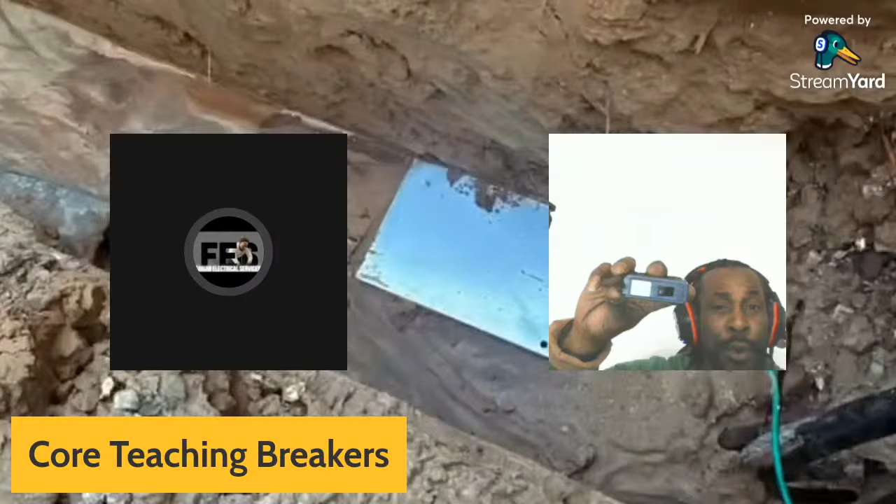So again, breakers will always protect the wire, and they will never protect the device. So for all those who are wiring - if you're wiring for your hood fan, microwave, and so on - make sure that you have the proper gauge wire. Make sure you also have the proper size breaker to avoid the interruption that it can cause.

So again, breakers protect the wire, not the devices. And what I'm going to do right now is pull up the rule for that.

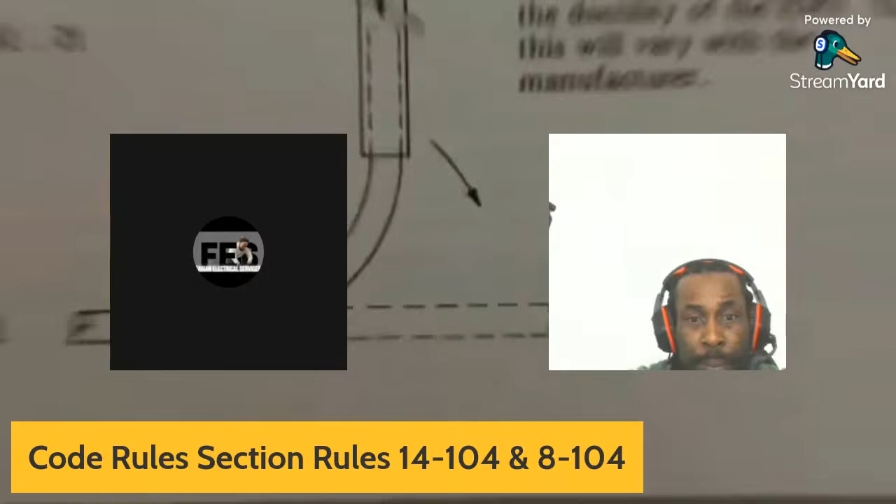Okay, so you're going to see on the bottom of the page here - just follow along with me here. It basically says 14-104, overcurrent devices, and it's also leading you to Appendix B.

And what that rule basically says is the rating or setting of overcurrent devices shall not exceed the ampacity of the conductors that they protect. So again, the rule is basically right there, and for all those who missed it, it's rule 14-104.

So the rule states the rating or setting of overcurrent devices shall not exceed the ampacity of the conductor that they protect, except where a fuse or circuit breaker having a rating or setting of the same value as the ampacity of the conductor is not available, and the maximum calculated or known load is in accordance with the rules of Section 8.

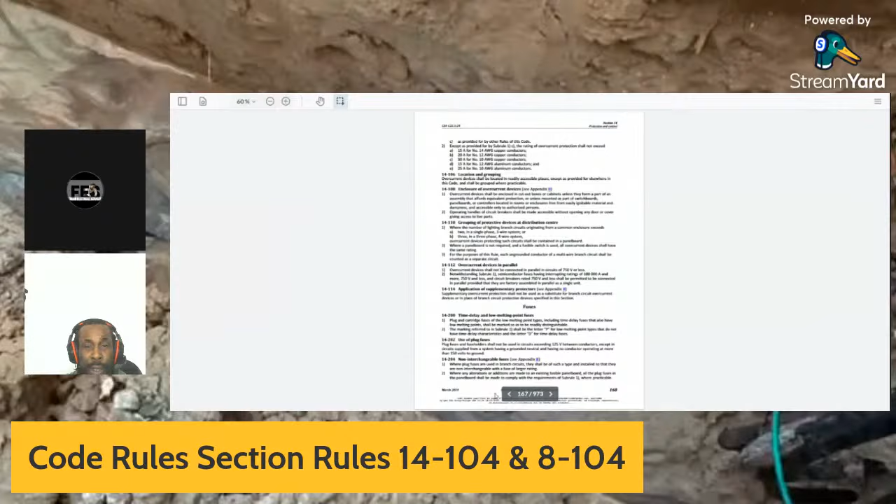So, like I said, the rule is up here on the screen, and for all those who has missed it, I'm going to read it over again before I move on to the next chapter. So 14-104, rating of overcurrent devices.

It tells you to see Appendix B. I'm not going to go to Appendix B. However, Appendix B is a very important part of this rule. And basically, when you see a Appendix B, Appendix C, whatever it may be, is basically telling you to go over to that rule and verify.

So the rating or setting of overcurrent devices shall not exceed the ampacity of the conductors that they protect, except where a fuse or circuit breaker having a rating or setting of the same value as the ampacity of the conductor is not available, and the maximum calculated or known load is in accordance with the rules of Section 8.

The rating or setting given in Tables 13 shall be permitted to be used within the maximum value of 800 amps.

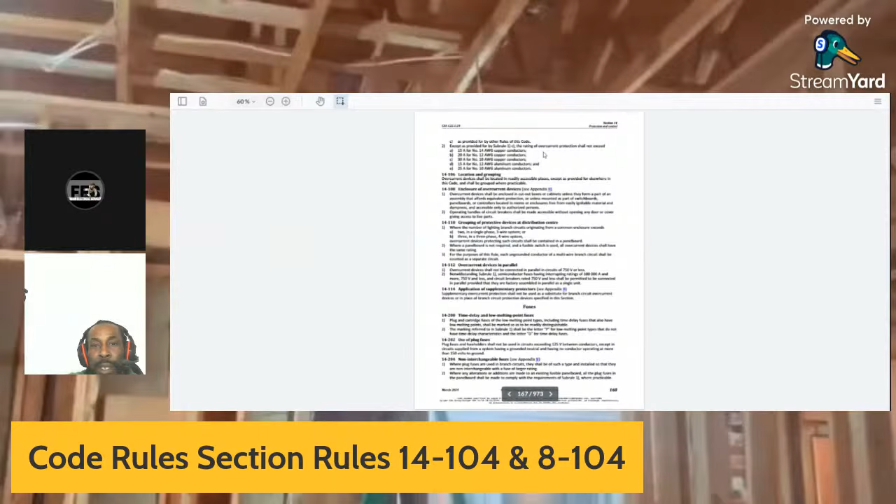The rating of overcurrent protection shall not exceed: A) 15 amps for number 14 copper conductor, 20 amps for number 12 gauge copper conductor, 30 amps for number 10 copper conductor, 15 amps for number 12 aluminum conductor.

So as you can see, the difference between A and D is one is copper, the other is aluminum. For the 15 amps for number 14, that's copper conductor. But then you also have 15 amps for number 12 aluminum conductor, and 25 amps for number 10 aluminum conductor. So that's the difference between your breaker sizing when it comes to aluminum and copper.

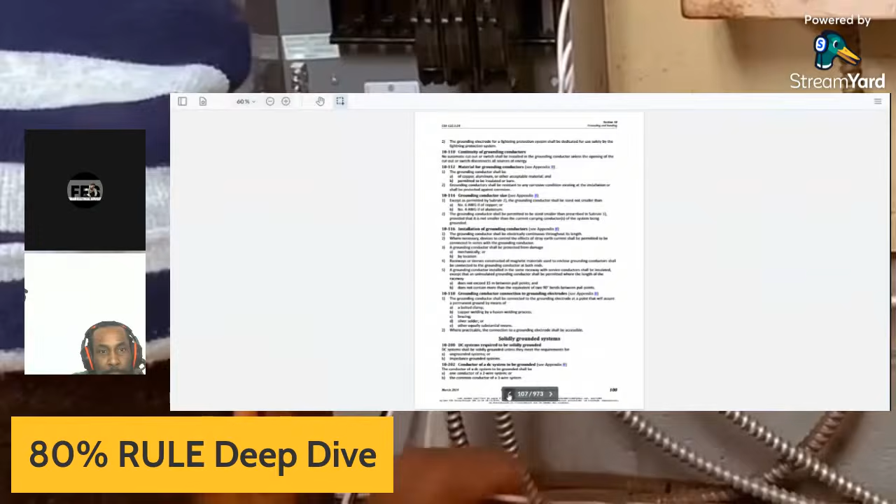So again, we're going to head over to 8104. That's the section I want to head over to. Okay, so here we are.

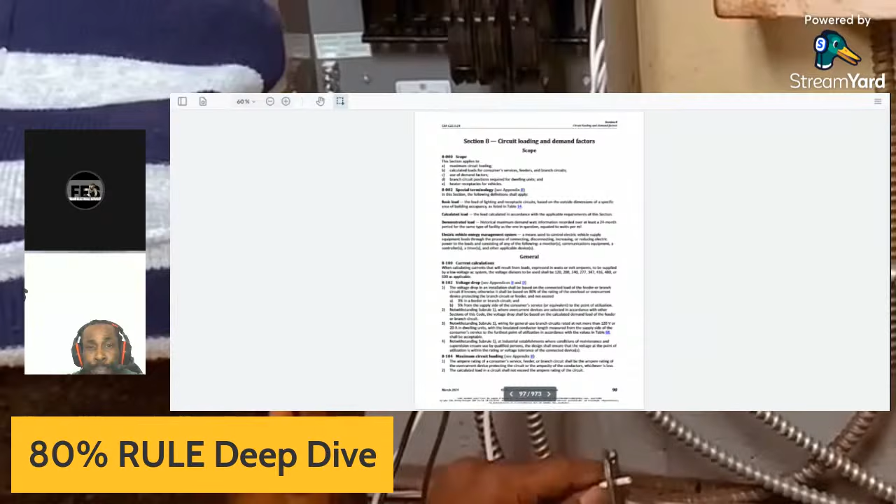This section applies to A) maximum circuit loading, B) calculated loads for consumer service, feeders, and branch circuits, C) use of demand factors, D) branch circuit positions required for dwelling units and heater receptacles for vehicles.

It also says in 8-002, special terminology, tells you to see Appendix B. And it says in this section, the following definitions shall apply. Basic loads: the load of lighting and receptacle circuits based on the outside dimension of a specific area of building occupancy as listed in Tables 14.

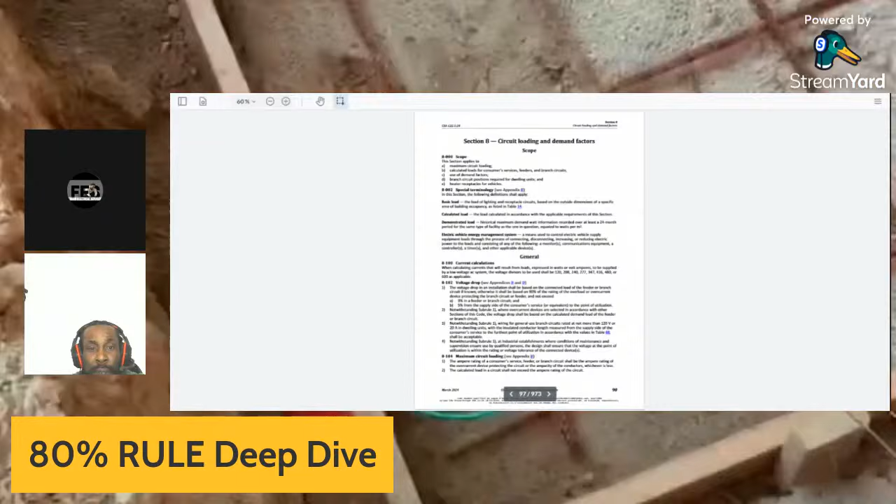Calculated load: the load calculated in accordance with the applicable requirements of this section. Demonstrated load: historical maximum demand watt information recorded over at least a 24-month period for the same type of facility as the one in question, equated to watts per meter square.

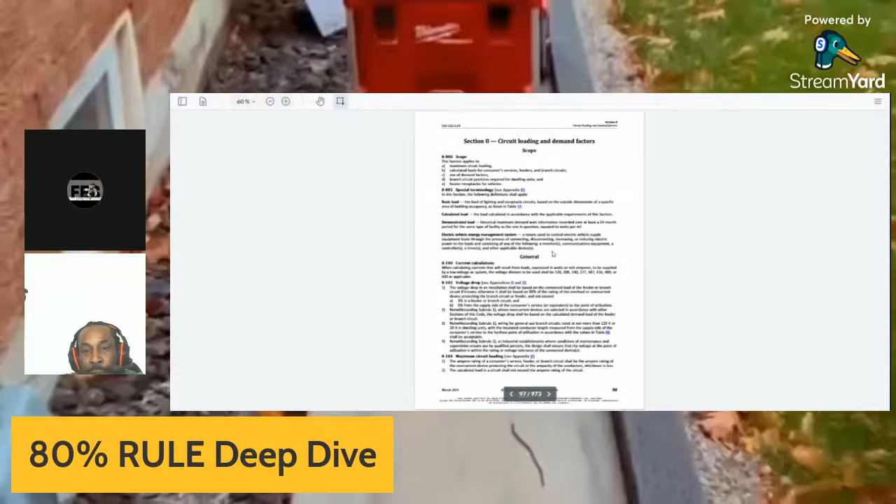And then it also tells you: electric vehicle energy management system, a means used to control electric vehicle supply equipment loads through the process of connecting, disconnecting, increasing or reducing electric power to the loads, and consisting of any of the following: a monitor, communication equipment, a controller, a timer, and other applicable devices.

So we're going to go over, sorry, I lost it there for a second.

So the rule that I actually want is 8104, which is at the bottom of the live stream. And it's basically maximum circuit loading. And it tells you to see Appendix B.

The ampere rating of a consumer service, feeder or branch circuit shall be the ampere rating of the overcurrent devices protecting the circuit or the ampacity of the conductor, whichever is less.

The calculated load in a circuit shall not exceed the ampere rating of the circuit. And then it goes on to also say this is 3.

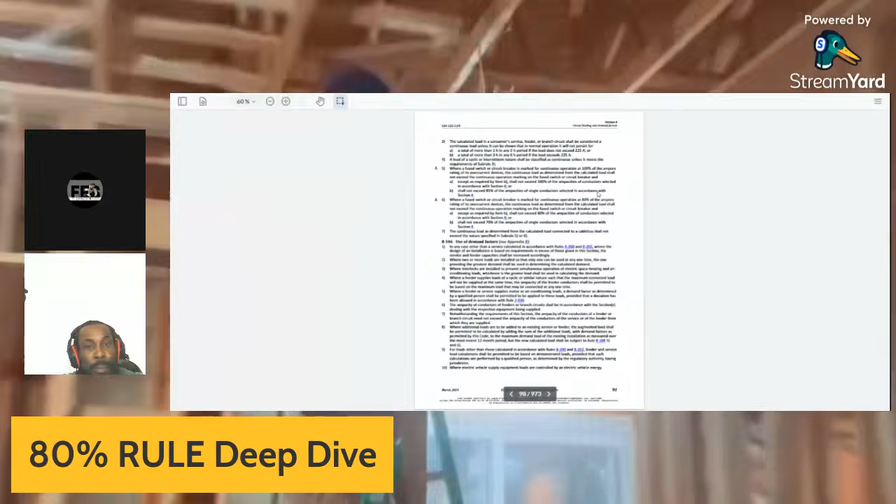Except as required by item B, shall not exceed 100% of the ampacity of conductors selected in accordance with section 4, or shall not exceed 85% of the ampacity of single conductors selected in accordance with section 4.

When a fuse switch or circuit breaker is marked for continuous operation at 80% of the ampere rating of its overcurrent devices, the continuous load as determined from the calculated load shall not exceed the continuous operation marking on the fuse switch or circuit breaker, and, except as required by item B, shall not exceed 80% of the ampacity of conductors selected in accordance with section 4, or shall not exceed 70% of the ampacity of single conductors selected in accordance with section 4.

The continuous load as determined from the calculated load connected to a cable bus shall not exceed the value specified in sub-rules 5 or 6. So again, as you see with the code, it gives you rules and tells you to relay it back to the sub-rule. This is basically how the code book works.

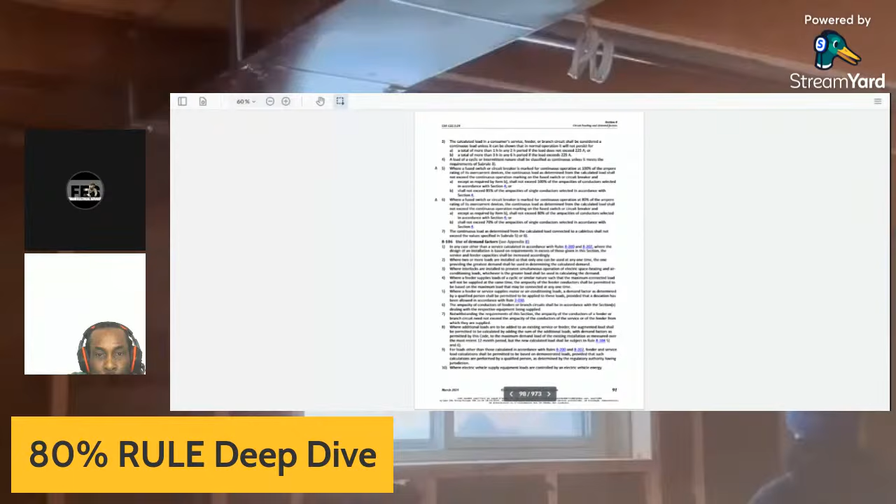So, okay, I'm going to read over 4 for those who are tuned in. Where a feeder supplies loads of a cyclic or similar nature such that the maximum connected load will not be supplied at the same time, the ampacity of the feeder conductors shall be permitted to be based on the maximum load that may be connected at any one time.

5. Where a feeder or service supplies motor or air conditioner loads, a demand factor as determined by a qualified person shall be permitted to be applied to these loads, provided that a deviation has been allowed in accordance with rules 2-030.

The ampacity of conductors of feeders or branch circuits shall be in accordance with the section dealing with the respective equipment being supplied.

Notwithstanding the requirements of the section, the ampacity of the conductors of a feeder or branch circuit need not exceed the ampacity of the conductors of the service or of the feeder from which they are supplied.

Where additional loads are to be added to an existing service or feeder, the augmented load shall be permitted to be calculated by adding the sum of the additional loads with demand factors as permitted by this code to the maximum demand load of the existing installation as measured over the most recent 12 months period.

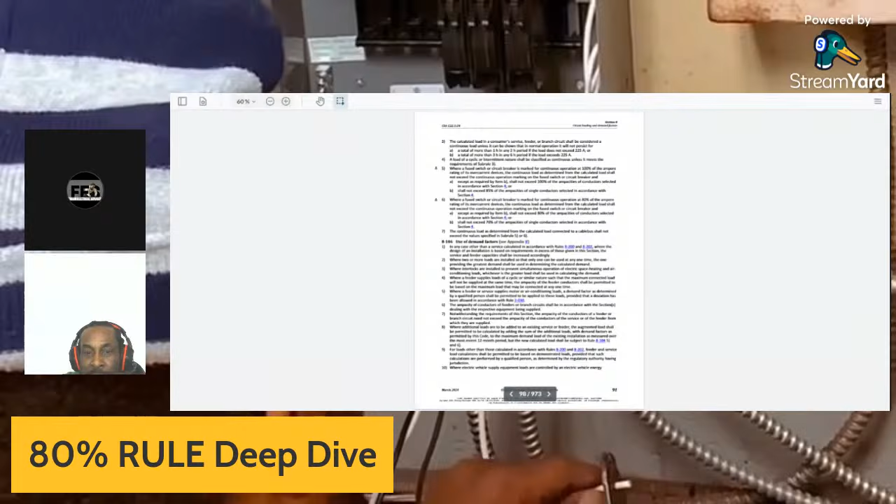So again, where additional loads are to be added to an existing service or feeder, the augmented load shall be permitted to be calculated by adding the sum of the additional load with demand factors as permitted by this code to the maximum demand load of the existing installation as measured over the most recent 12 months period. But the new calculated load shall be subject to Rule 8-104, 5, and 6.

For loads other than those calculated in accordance with Rules 8-200 and 8-202, feeder and service load calculations shall be permitted to be based on demonstrated loads, provided that such calculations are performed by a qualified person as determined by the regulatory authority having jurisdiction.

Where electric vehicle supply equipment loads are controlled by an electric vehicle energy management system, the demand load for the electric vehicle supply equipment shall be equal to the maximum load allowed by the electric vehicle energy management system.

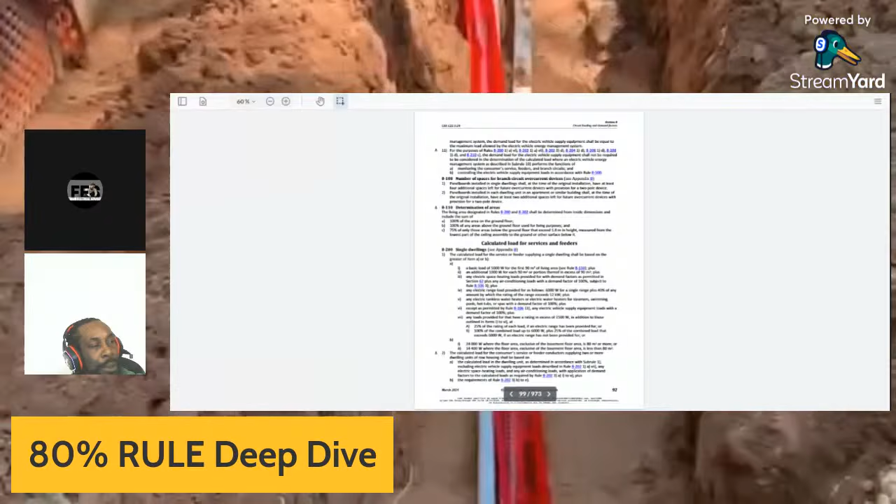So again, example: if you have an electric heater, you cannot overload it. Let's say your electric heater is drawing 16 amps.

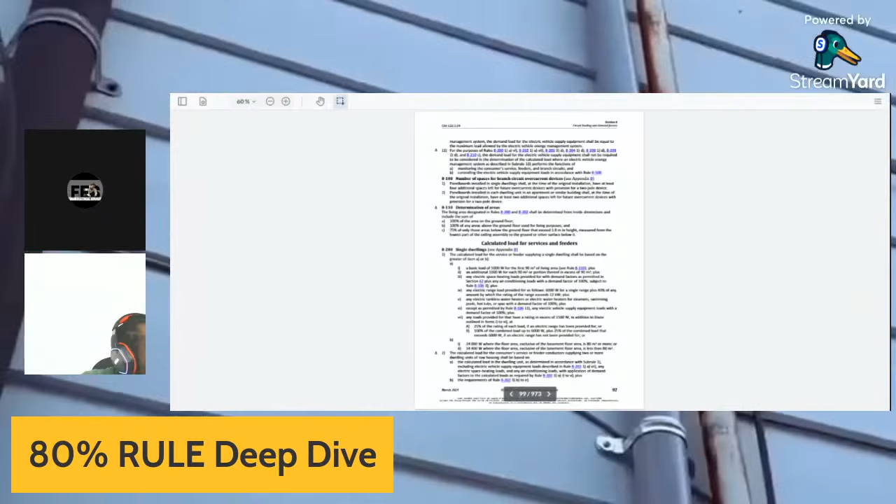You have to pay attention to the finer details to spot the mistakes, right? Yes, definitely, you have to pay attention. Again, it's important when it comes to electrical. So all details are very important. You have to pay attention.

So that's why I have this rule here. Basically, what this page is, this is the code book, it's part of the code book, and this is where I normally find the rules. Again, it's very important because there's a lot of details in these rules that you can miss, as Gloom Platoon said, you have to pay attention.

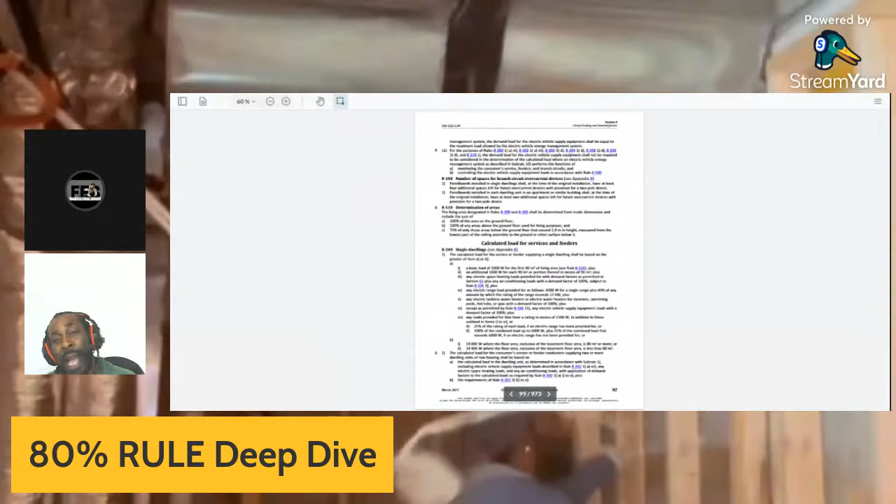There's a lot of details in here that a lot of people are not aware of. Even licensed guys also will make mistakes. The reason being is because we're so quick to read the code book that we miss the importance of what we need to know, and a lot of times we'll miss that. But if you do read it over twice, you can't miss it.

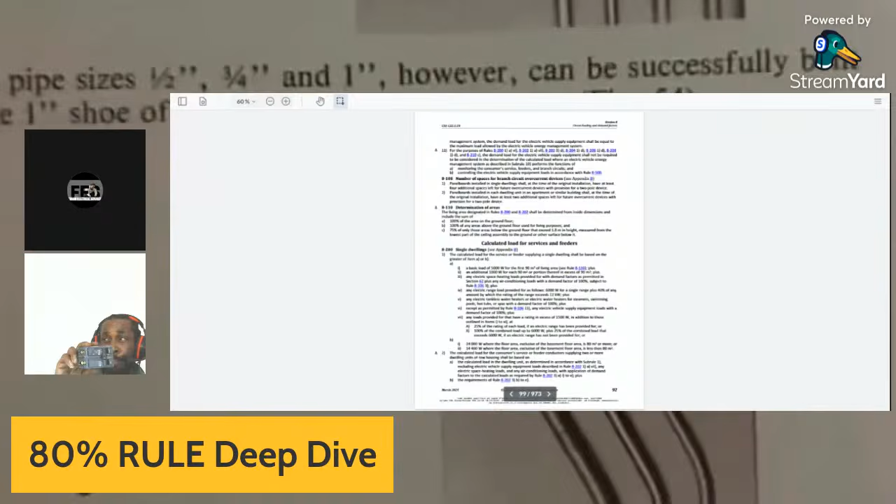So this is basically where the 80% rule comes out of, 8-104. And basically what it is: if you have a breaker like this, for instance, this is a 20 amp 2-pole. Now this breaker, you have a 12 gauge wire on this breaker. And basically, you cannot oversize the conductor, you cannot overload the current. But what I mean by that is you have to have up to 80%, and you have to have a 20% left over.

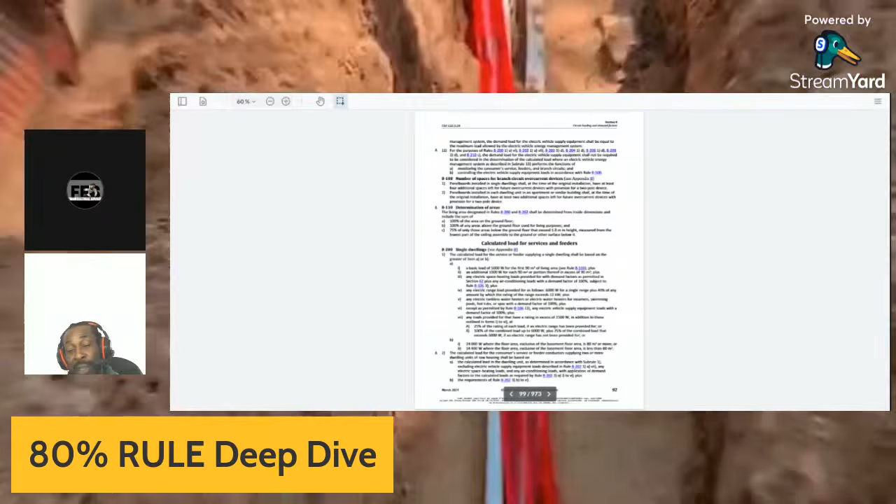So what this 20% basically does, it helps protect the wire. If there's any overheating going on, it's going to trip the breaker. So a lot of times you'll see a lot of people having issues with their circuit, with their breakers, and you probably will see that the breaker didn't trip. It's because of the 80% rule that it didn't kick in. So when you have too much load on the circuit, when you overload the circuit, that 20% cannot protect the wire like it's supposed to. And when it's protecting the wire, it will trip the breaker. That's what it's supposed to do.

Okay, let me go to the comment.

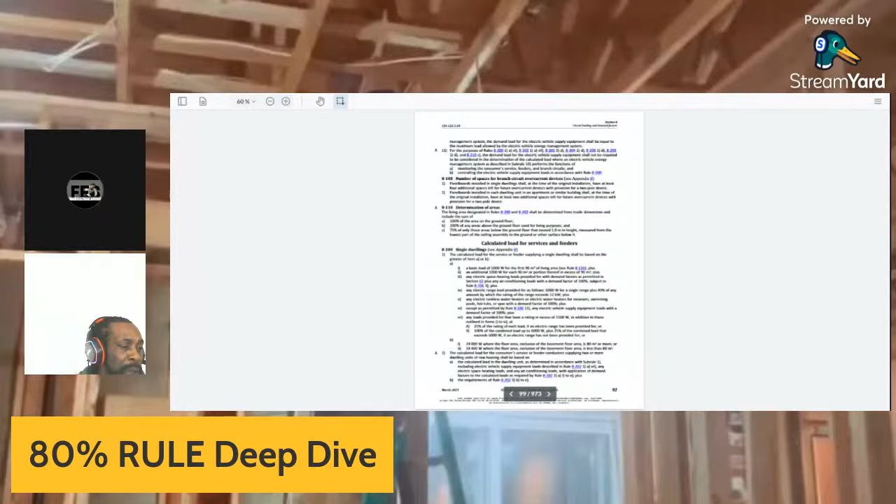Most professionals go off of experience because the work is like muscle memory, often not following the code, but that's why a lot of jobs look sloppy when you look behind the walls. Definitely, Gloom Platoon.

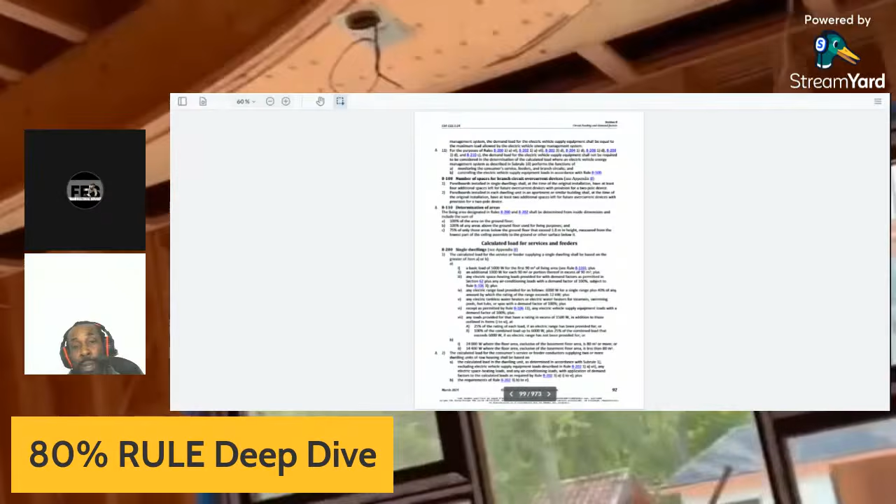It's a mistake that a lot of electricians make. I myself probably did in the past when I was younger, coming up. But because I know the safety behind all of what goes on right now, as a young apprentice coming up and a newly journeyman, you don't really know the difference. So you assume that the rule is always going to stay the same, but the rules don't always stay the same.

The rules switch as soon as there's an issue in a home. Let's say there's a fire, there was a badly mistake oversizing the breaker, or let's say, for instance, you have the arc fault breakers that are installed for protection throughout the house now. So every time something happens, they change the rule, and a lot of guys are not aware of that because they don't either check on the rules. You can pull it up and check to see if there's a rule change. So yes, a lot of times guys will just, it's called

guessing. There's a rule for it, rule of thumb. They go by the rule of thumb basically. They go by what they were taught instead of double checking. I guess it's being lazy, and that's why you do have a lot of fires in the homes, and a lot of sloppy work.

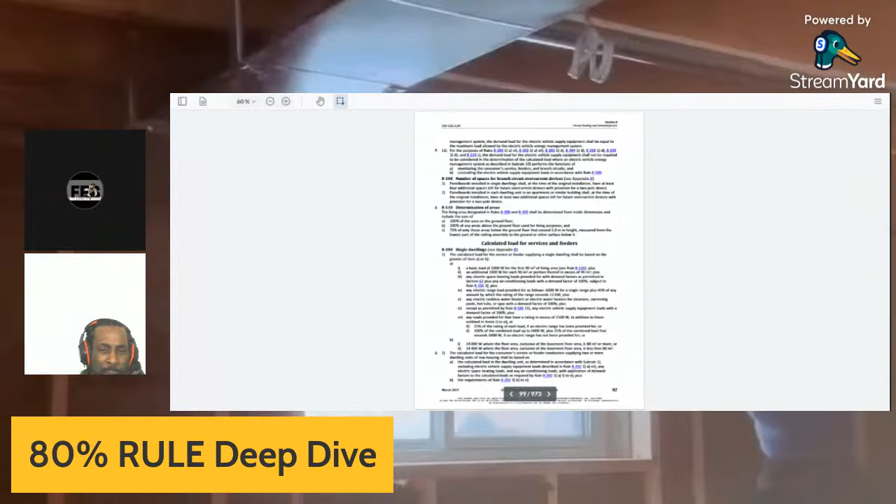You'll find a lot of wire taped up behind the drywall instead of putting it into a junction box. So that is what basically goes on inside of the homes when you don't follow the code. Again, it's not everyone that's going to know how to find these rules. If you are a DIY, you're probably not going to find these rules as fast as I will. I'm not sure, I don't really know. I'm just saying.

But this is where we get our rules from.

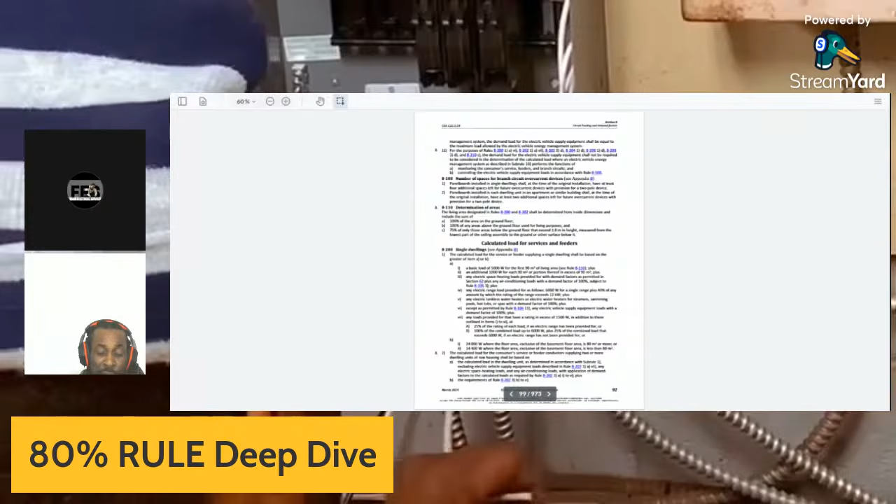So again, real installation examples. For instance, EV chargers. Many times I install EV chargers, and a lot of times what happens is either the client has one of those EV chargers that are rated for 60 amps, or rated for 40 amps, or they go down to 20 amps. They're basically adapters. You can change out the adapters, you can change out the settings

in the Tesla vehicle. So let's say you don't have a lot of amperage in your panel and you have an EV charger and you want to use 60 amps, but you don't have the required space in the panel, because again, the panel does matter. If the panel is overloaded, you cannot install a 60 amp breaker for that EV charger.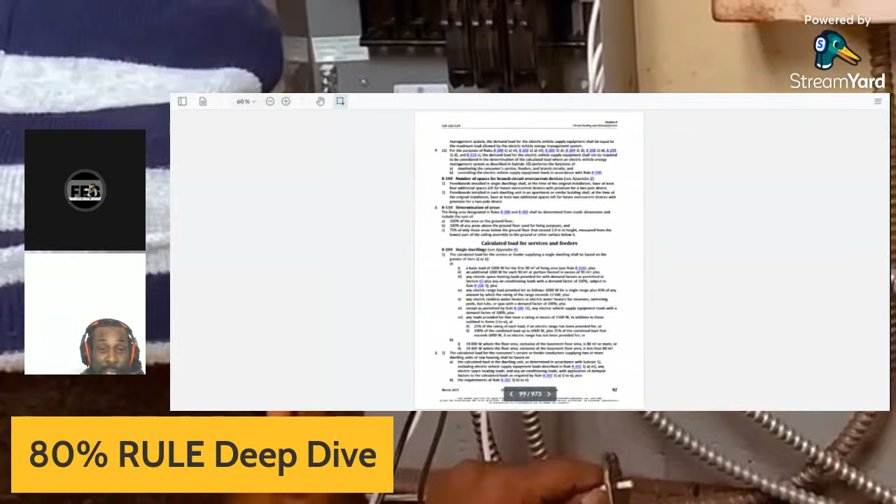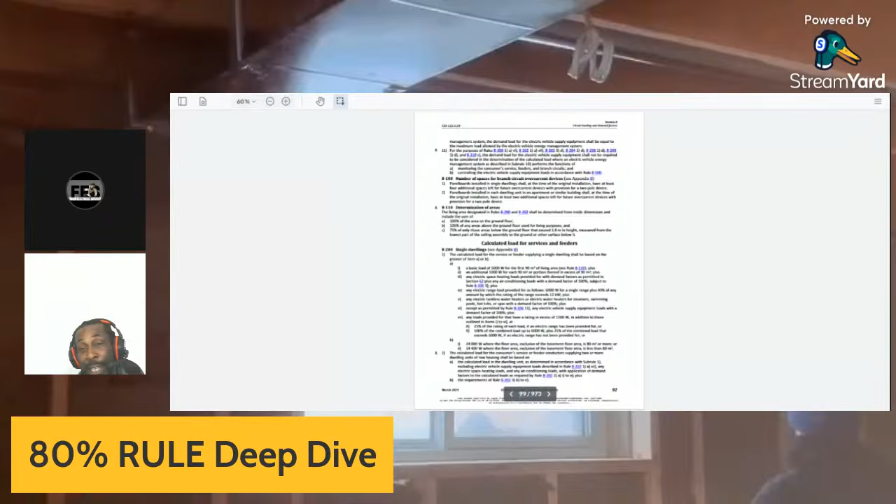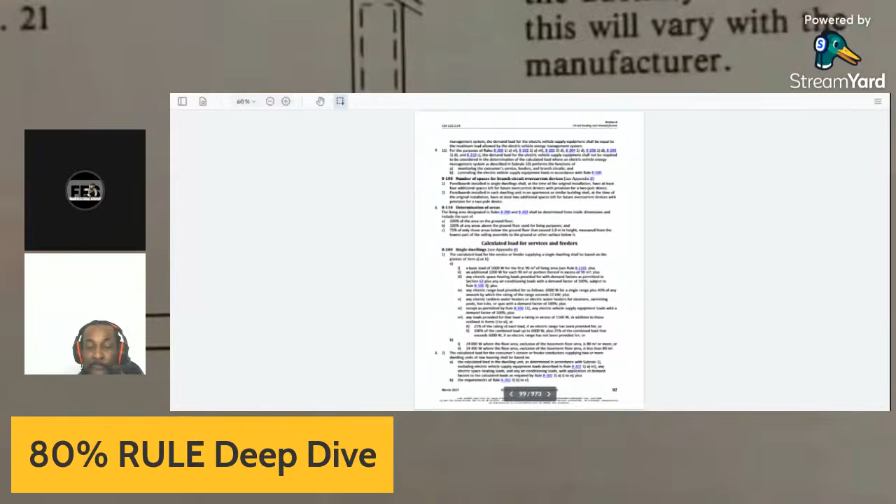So what you can do is you can drop it down to 32 amps, okay, but you're going to feed it with a 40 amp breaker. You're going to feed it with a number 8 gauge wire, or if you're generous, you can use a number 6 wire. That's normally what I do, just in case the customer wants to switch back from the 32 amps to the 60 amps, but the 60 amps actually becomes 48 amps instead of 60 amps.

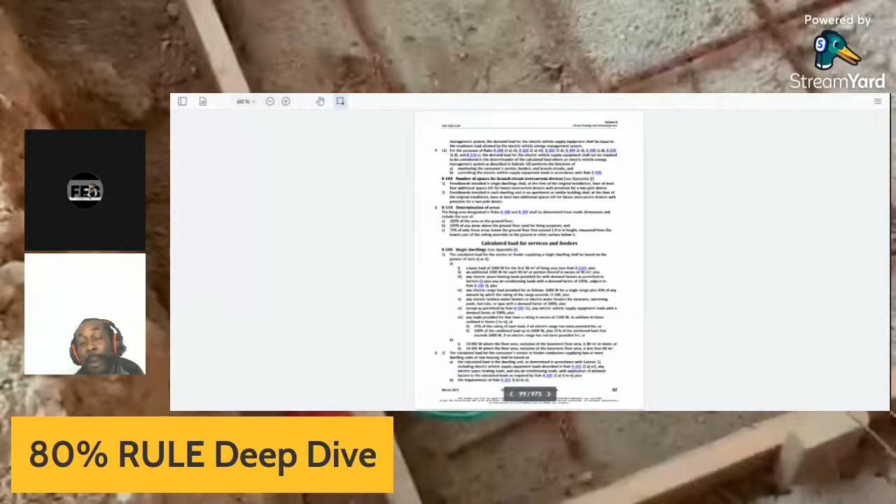So you still have that protection. You still need that protection, even though it's an EV charger, to protect the wire. So if you are going to be loading at 48 amps, you're going to have to fuse it at 60 amps, which there is no—

So what's going to happen is you're going to have the 60 amp breaker, but the actual EV charger is going to be drawing about 48 amps. That's the protection that's going to be kicking in. The wire and the breaker again leads back—you have to protect the wire on the circuit with your breaker. So again, you're not protecting the appliance, you're protecting the wire.

Again, if you want to go to 32 amps for your EV charger, you use a 40 amp breaker with a number 8 wire, and the 32 amps gives you that 20% that you need in order for your circuit to work accordingly.

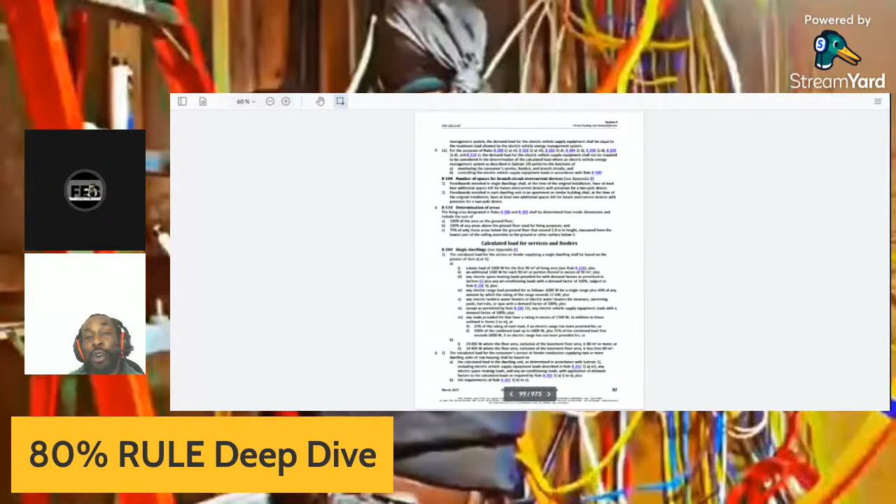Again, these are all inspections, so you have to make sure it's properly done. With lighting loads, the difference is it goes for 1500 watts. So for lighting, let's say you have a pot light drawing 0.2 or 0.4 amps, whatever it may be, add those up. As long as you're not over 1500 watts, you have to be about 1200 watts for your circuit to work accordingly. That's the lighting load.

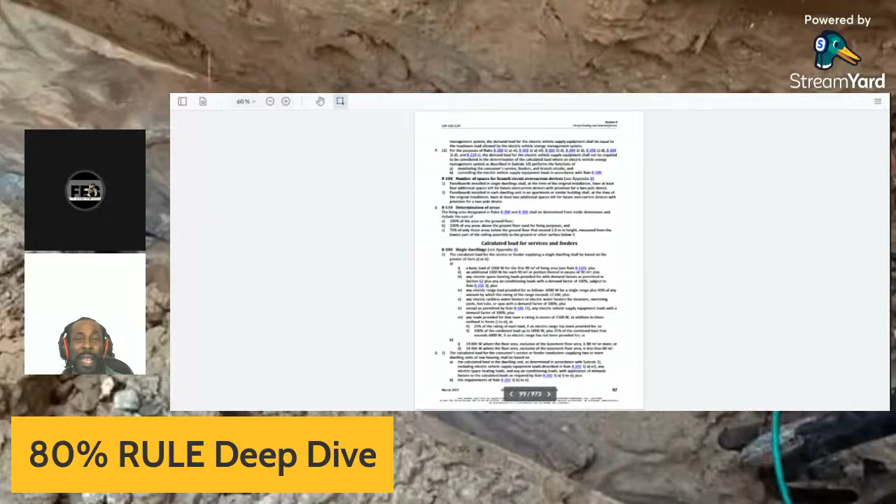Number 14 is normally used for a lighting circuit, but you can step it up to a 12-2 wire. It all depends on the distance also - that's probably going to be another live stream. When I say distance, there's a voltage drop, so it all depends on your distance and how big the house is. You'll probably use a 14 or a 12.

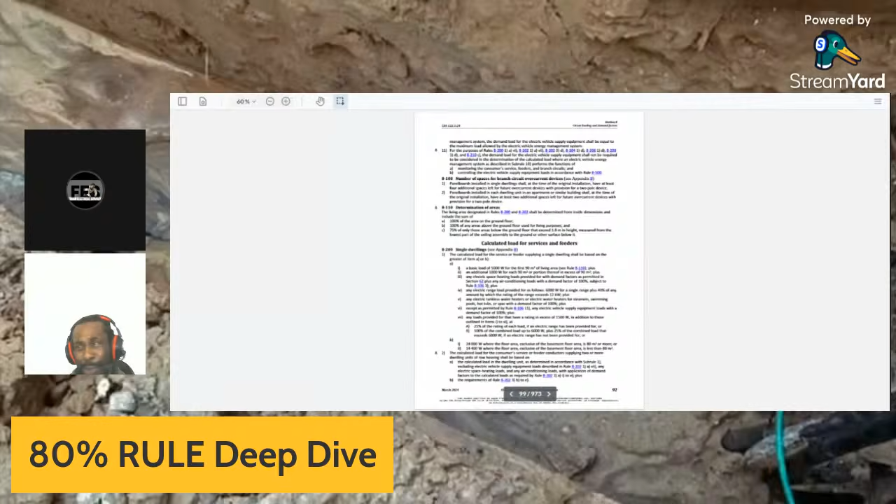That's why a lot of times you'll see homes in the bathrooms with the light and the fans start to flicker because there's too much on the load. I have to change this setting here, guys, one second.

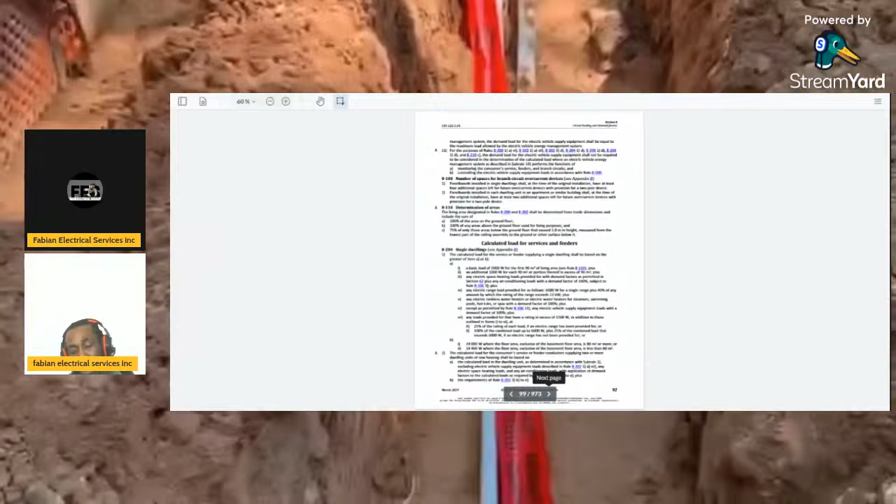You've basically mixed motors with lighting. There's nothing wrong with mixing, nothing wrong with putting your bathroom fan and your lighting on the same circuit. The problem is if you have too much load. Let's say you have your plug, your bathroom GFI, and you plug in your hair dryer, and it's connected to that - then you have too much load. It's going to start to flicker and so on, and it's probably going to overheat. So that's basically the lighting circuit.

Again, it's very important to make sure that's correct. Even on jobs, I've seen 14 gauge wire on a 20 amp breaker - it's not correct. If you're going to have an inspection, it doesn't matter, you should always try to do the job correctly regardless. Some jobs don't require inspection, most jobs require inspection, it depends what you're doing. So even if you don't require an inspection, you should always try not to put a 20 amp breaker on a 14 gauge wire.

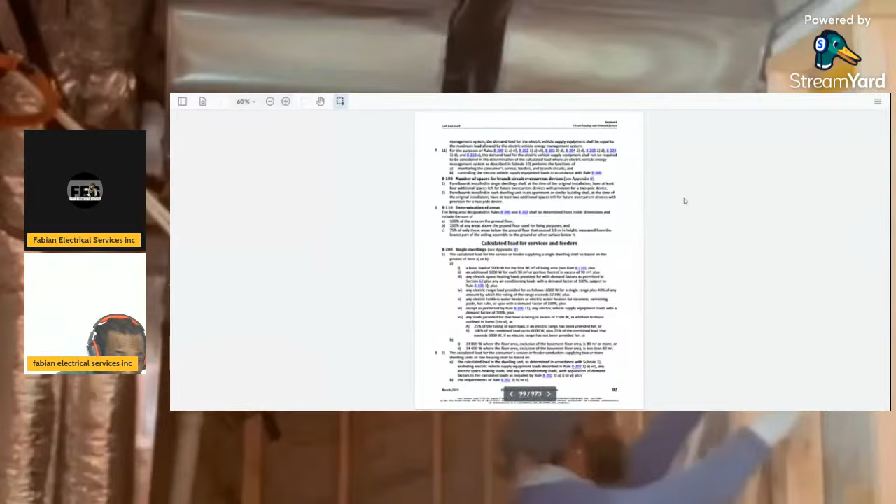The voltage is different in a commercial building and a residential building because of the size, or because of the expected amount of load. In residential, there's not a lot of big loads going on, so the voltage is definitely going to be different. In residential, you normally have a 100 amp panel, 200 amp panel, or you go up to a 400 amp panel.

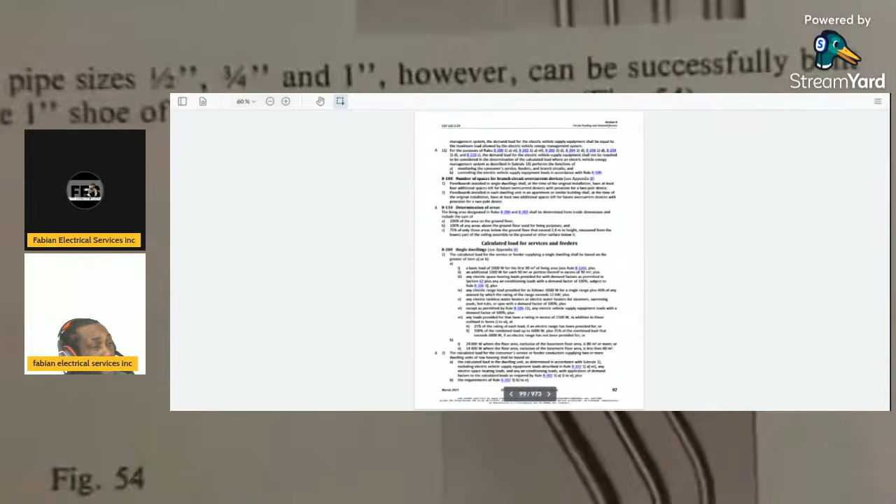You also have in between, 150 amps, but again they don't have a whole lot of load. Even your EV charger doesn't draw a whole lot. So when it comes to homes, it depends on the size and what's going on. If you check out my videos, you'll see the current home I'm working on - it's a pretty large home, and it's a 400 amp service because there's a lot of stuff going on there.

When it comes to commercial, you have to calculate it according to the specs. In commercial, they normally give you a set of specs - everything's laid out, everything's planned. You have your base building drawing, your tenant drawing, stores if there's going to be in there, so they calculate that load accordingly. In commercial, it's a three-phase system, so what happens is you're allowed to share neutrals. When you start to share neutrals, it becomes a lot different from residential.

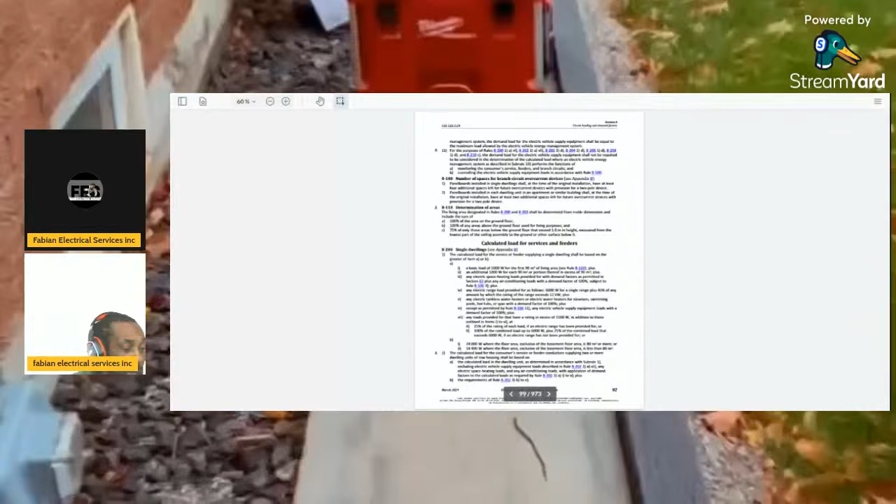You're basically sharing neutrals in order to have your circuit flow efficiently. So that's the difference between residential and commercial. Residential is single phase, I hope I'm explaining it properly to you. But yes, the voltage is definitely a big difference in commercial.

Like I said, commercial is... I'll actually go to the commercial rule now that you brought it up, and you will see.

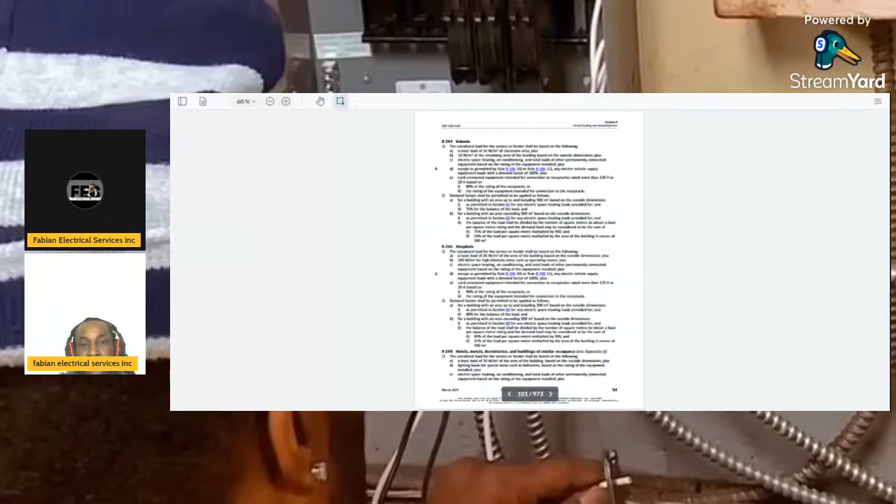Schools, for instance, this is a commercial building. It says the calculated load for the service or feeder shall be based on the following: a basic load of 50 watts per meter square of classroom areas, plus 10 watts per meter square of the remaining area of the building based on the outside dimension, plus electric space heating, air conditioner, and total loads of other permanent connected equipment based on the rating of the equipment installed, plus, except as permitted by Rule 8-106(10) or Rule 8-106(11), any electric vehicle supply equipment loads with a demand factor of 100%, plus cord connected equipment intended for connection to a receptacle rated more than 125 volts or 20 amps, based on 80% of the rating of the receptacle or the rating of the equipment intended for connection to the receptacle.

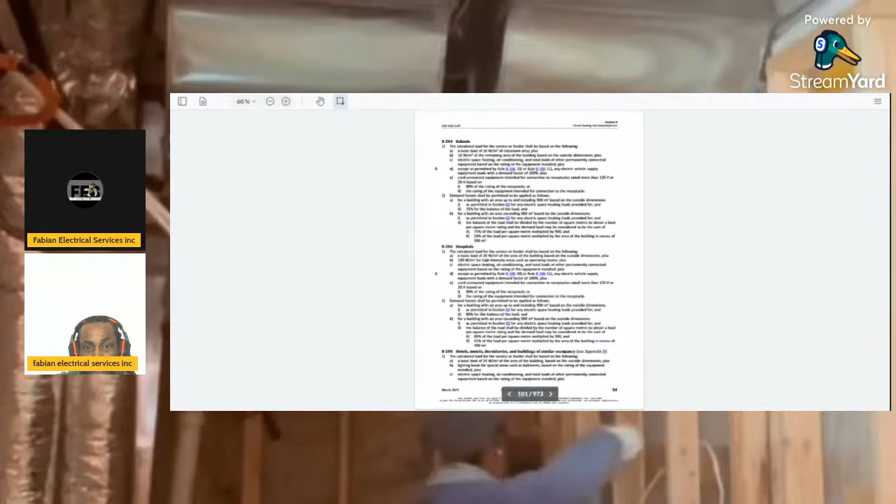Demand factors shall be permitted to be applied as follows: for buildings with an area up to and including 900 meters squared based on the outside dimensions, as permitted in section 62, for any electric space heating loads provided for, and 75% for the balance of the load.

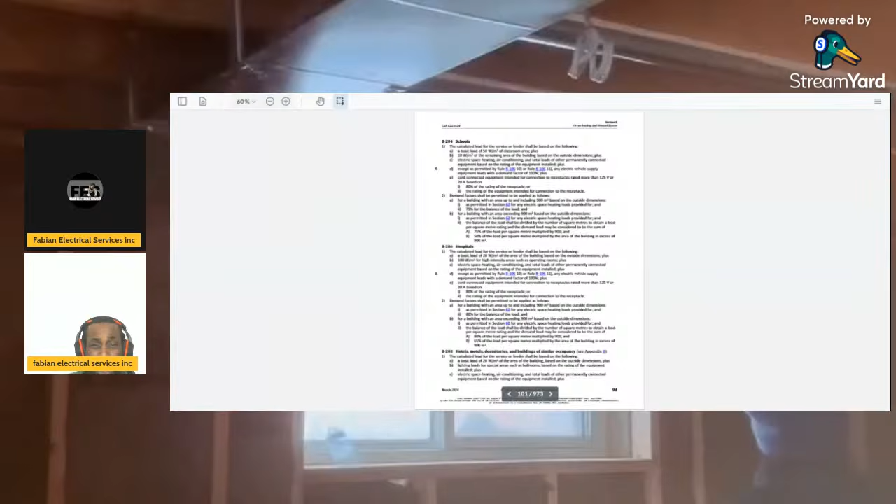So this is basically where we get our calculation loads from. There's a big difference between residential and commercial. Again, commercial, you do have a lot of heavy equipment going on, so the load factor is going to be a lot bigger. And again, commercial is 600 volts, while residential is 300 volts. So there's a big difference.

And that's why you'll see a lot of times in commercial tenant restaurants and so on, or strip plazas, they'll bring their power in to the disconnect and leave it. It's up to us as the electrical contractor to go in and calculate the load that we're going to be allowed inside of that commercial building. So yes, it is a big difference.

So again, on jobs, I've seen number 14 wire with a 20 amp breaker, and that's a problem when it comes to overheating. You can't have anything overheating.

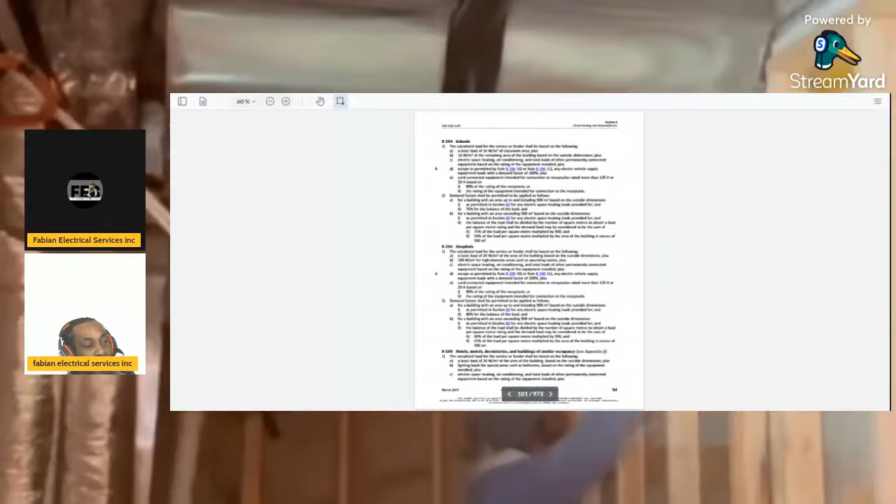So I'm going to go on to common.

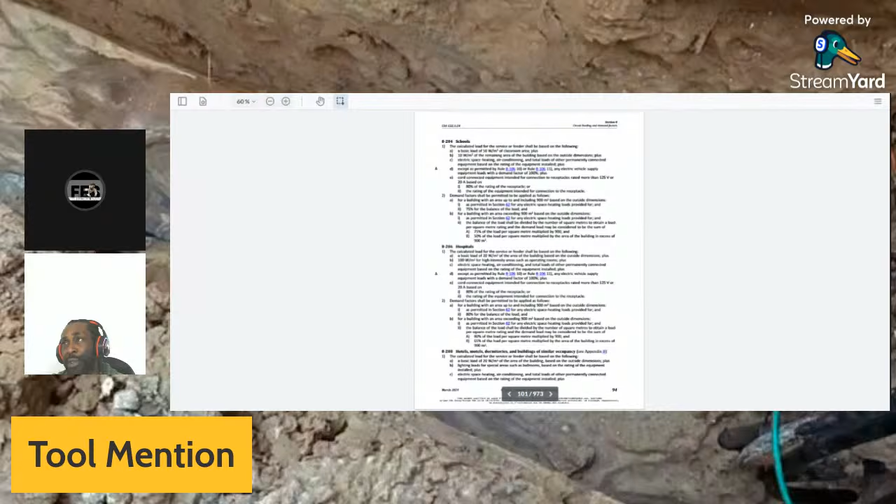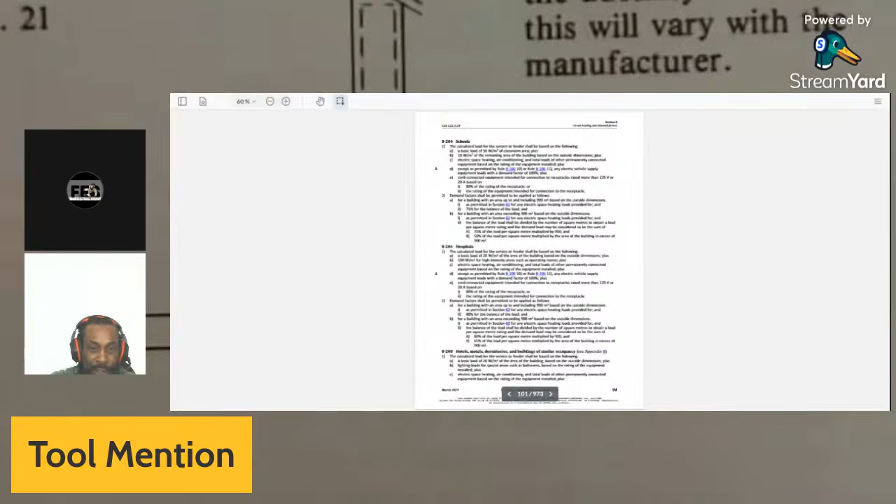Yes, no problem, Bloom Platoon. You're welcome. So again, I'm going to... that's the breaker finder that I use to basically find my circuits.

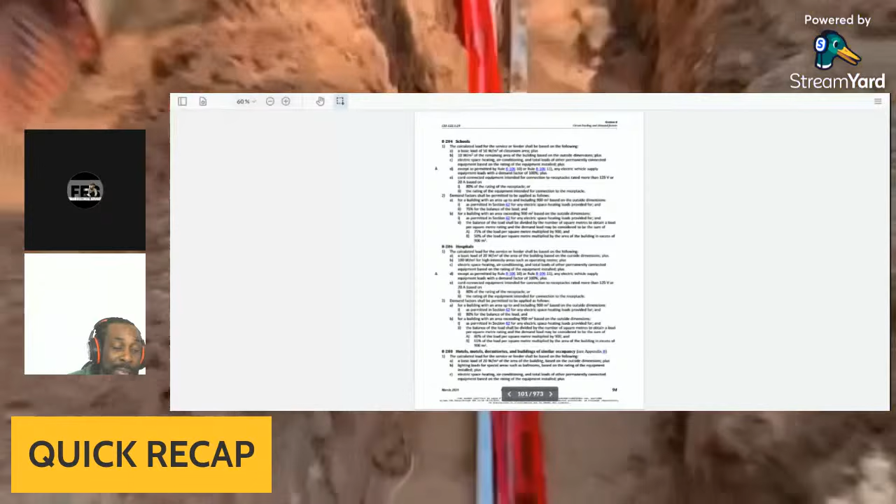Breakers protect conductors. They don't protect the equipment, and a lot of times people are under the conception that the breakers actually protect the equipment, but the breaker is not there to protect the equipment, it's there to protect the wire.

That's why if you have a 14 gauge wire, you have to have a 15 amp breaker on that circuit. If you have a 12 gauge wire, you have to have a 20 amp breaker on the wire. If you have a 10 gauge wire, you have to have a 30 amp double pole breaker on it. And if you have an 8 gauge wire, you have to have a 40 amp double pole breaker on that in order to protect your wire accordingly.

Again, you can oversize your wire, but your wire has to be able to fit inside of the breaker itself. So let's say, for instance, this is a 20 amp breaker, and if you have a number 10 gauge wire and you want to install it on this breaker, you have to make sure that it's going to fit in the slot here.

Okay, so very, very important. When you are sizing your breakers, if you are going to oversize your wire, just make sure that your wire will fit in the breaker. So again, breakers protect the wire. They don't protect the device.

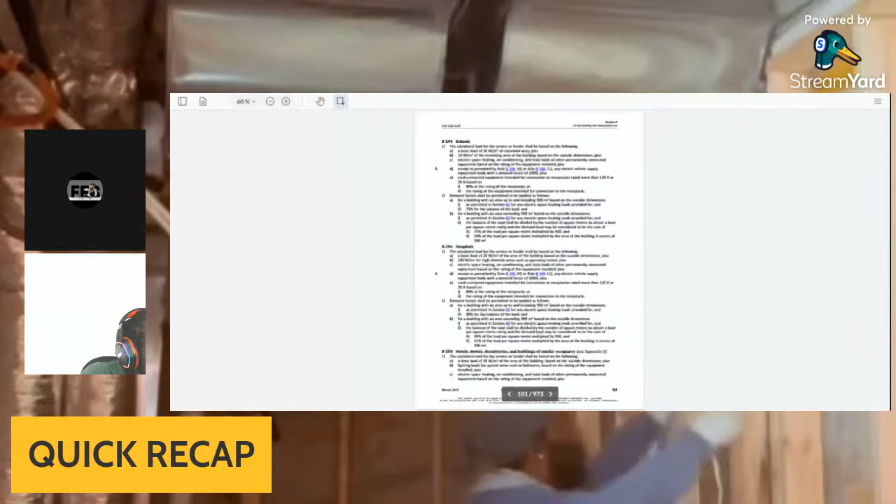So again, Rule 14-104 is basically where you're going to find your overcurrent device. So that's basically where you're going to find your breaker rules and so on. And it simply goes on to say breakers must not exceed conductor ampacity. It prevents conductor overheating.

And again, 14 gauge wire on a 20 amp breaker, that is a big mistake. And you're also asking for a field inspection issue. The inspector will fail the job. 14 gauge wire on a 20 amp breaker, you're not going to pass that job. You will get a defect, you will get a defect. It's a simple swap out for breakers.

And Rule 8-104, this is the rule that I'm currently in. And again, maximum circuit loading. Continuous load must be calculated at 125%.

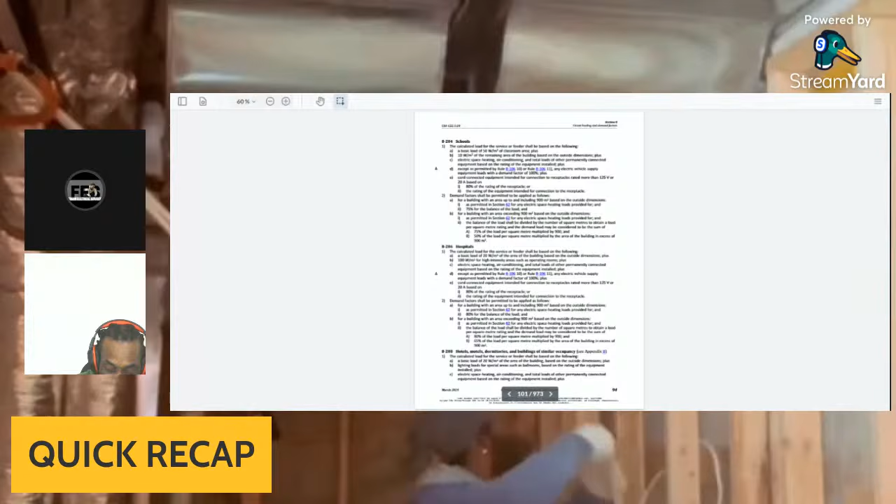A lot of the new toilets have the receptacles that are required. They have the lights inside of them and so on. When you walk into the washroom, the cover will lift up. So those require a nameplate. They also require what's called a CSA sticker. A CSA sticker allows you to basically install that device.

Without a CSA sticker, you're basically asking for issue. So this is the breaker I have here, and if you look at the front of the breaker, you're going to see there's a CSA stamp here. That's basically what you're looking for when you're installing your devices. You have to make sure you have that CSA standard on it.

Bloom Platoon says, even on small jobs, wiring or rewiring, you have to check for any breaks in the wires before you say complete. Even the wires sometimes are not perfect when you unroll.

Yes, Bloom Platoon. So most new wires will come perfect, but the problem is when you're pulling the wire. So it all depends on how you pull the cable.

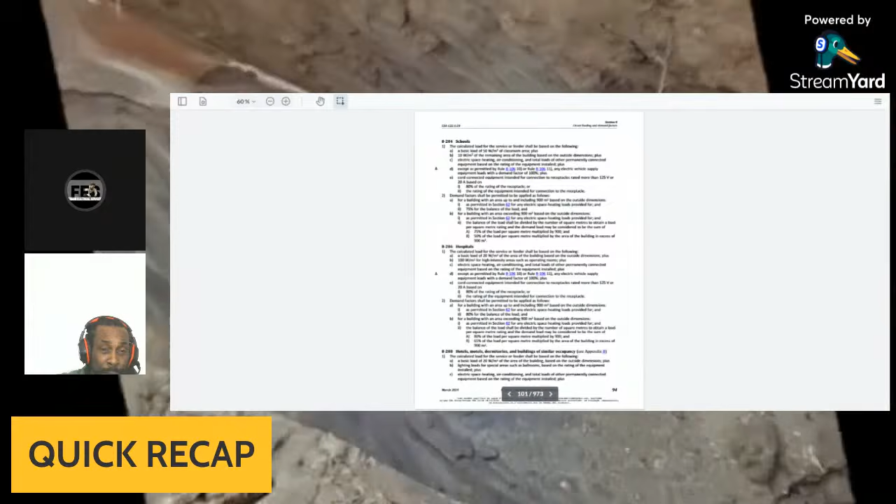There's something called a wire spool that you use, and basically what you do is you set up your wire on the wire spool, and once you start to pull your cable, you always have to pay attention to what you're doing. Yes, I have run into that issue where once you start to pull the cable, you can damage the wire.

And when you do walk away from that job, and if the drywall is up and so on, you're going to have an issue. That's why a lot of times when I do my roughing, I make sure that before I have my inspection, let's say my first roughing inspection, I do a walkthrough before I actually call for the inspection to make sure there's no broken wires and so on.

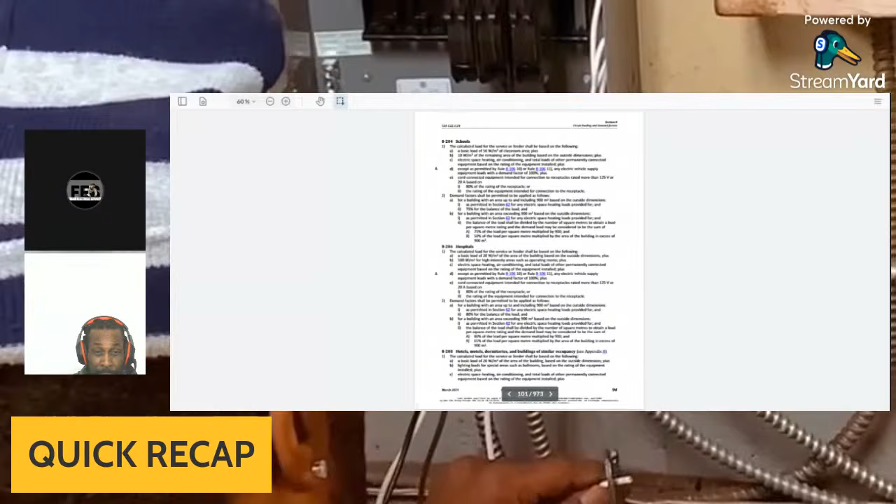And also, again, the way you staple inside of homes versus commercial is different. A lot of commercial jobs use EMT, TECK cable, and so on. Residential is mostly the NMD90 and so on.

Those wires you're going to see on the screen, the set of yellow cable here, that is what we normally use in residential. What happens is when you pull those cables, if you catch it on your nail, it's going to get damaged.

It's a lot different, but again, if you have a wire tracer, you can trace your wires out also. There's a lot of stuff you can do to make sure your actual wire is safe at the end of the run. You can test your wire through continuity, whether using a meter or your toner. There's also a toner you can use to ring your wires out. So there's many different things you can use to protect yourself when it comes to that.

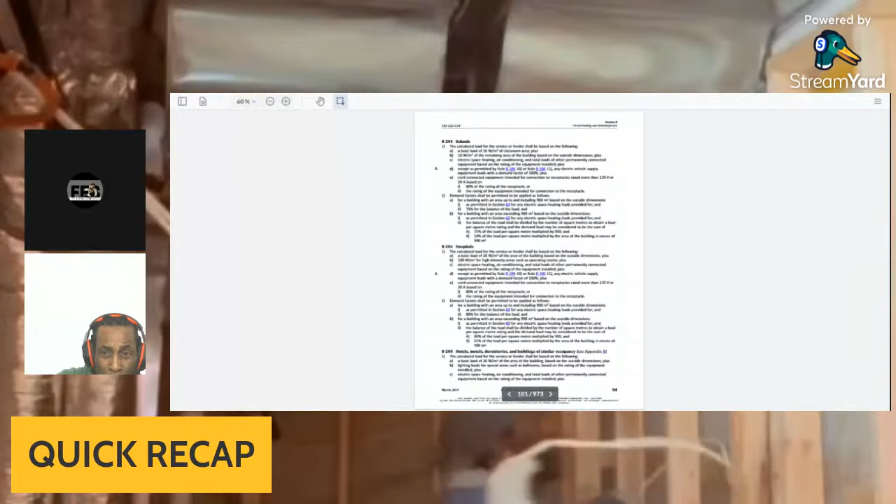When it comes to sizing my breakers, whether commercial or residential, you have to make sure you calculate the load, you have to calculate what you're putting on that circuit. Most times, if I'm doing a job and the client has, let's say, a built-in oven, those hardwire ovens, I want to make sure I have the appropriate amperage, so I'll check the nameplate. Even your air conditioner outside has a nameplate on it. Basically, that's how you find your amperage.

Again, there's also, you either go up or go down, it depends on the circumstance of what you're doing. So it's very important to basically size your cable accordingly, and make sure your breaker is sized accordingly. So that's basically the quick recap here.

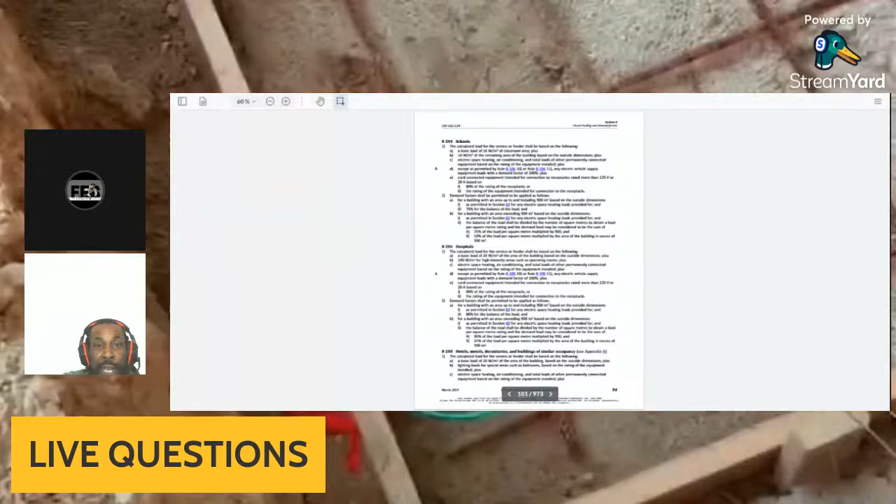It is a live Q&A, and you get to ask your questions. I get to answer them for you as best as I can when it comes to the knowledge and being in the trade for so long.

So again, this is the rule that I've been using for tonight's live stream. For all those who missed the beginning of the live stream, you're going to see this rule along with 14-104 on the live stream. This is where I go to find the code rules.

A lot of mistakes happen on the job. It's not because we are unaware - a lot of times journeymen are aware, electricians are aware, but sometimes it could be just tiredness, laziness. That's the reason why sometimes you'll see breakers mismatching in the panel. It's not because we don't know, or the person before didn't know. It could be simple laziness happening, guessing instead of using the code book, which is very dangerous. Always best to double check the rules.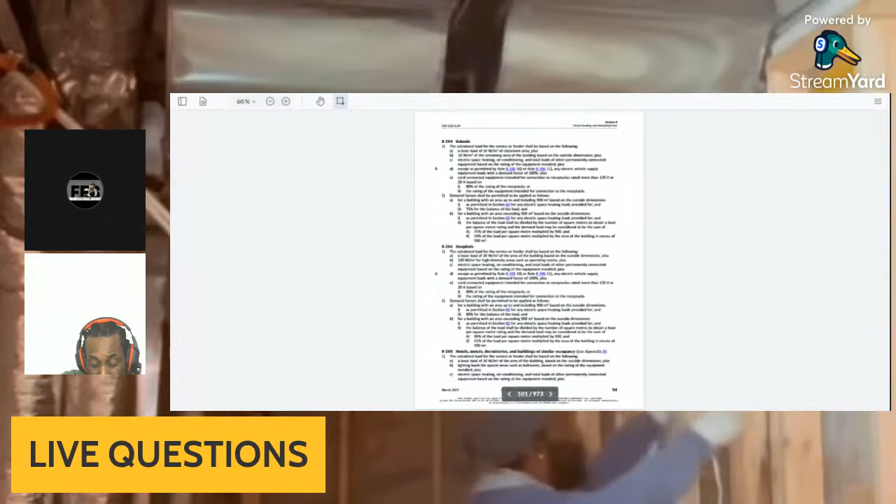So under rule 14-104, overcurrent device: breaker must not exceed conductor ampacity. It prevents conductor overheating. So number 14 gauge wire on a 20 amp breaker - again, that's a violation. It's basically a fail job.

So we're going to go on to rule 8-104. Again, this is a recap. Maximum circuit loading - continuous load must be calculated at 125%.

Sometimes it's good to get a second opinion to see the difference when you're getting a house wired. If the opinions align, then you can go ahead with the electrician you choose. Yeah, it's always good to have a second opinion, but again, you never know what you're going to get.

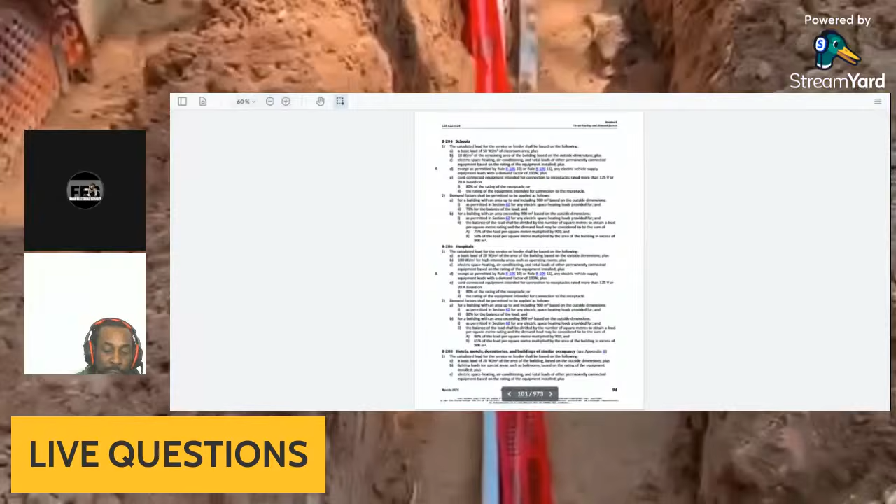Continuous load must be calculated at 125%. This rule comes out of 8-104, maximum circuit loading - continuous loads must be calculated at 125%. Again, this is continuous load, and when they say continuous load, they're talking about motors and so on, something that runs continuously. You have to size it accordingly at 125%, because the motor is running constantly, so it has to be calculated at 125%. Example:

A 20 amp breaker times 80% gives you a 16 amp continuous load. Example: electric heater drawing 16 amps - a 20 amp breaker can safely carry about 16 amps continuously.

Very important guys, the continuous load when it comes to heating and motors is a whole lot different - that's why a lot of times you'll see your motors tripping. For instance, if I am sizing a pump, even if it's a receptacle for the sump pump, I'm going to make sure I go to 20 amps, because when it comes to motors, you have something called inrush current. What that inrush current does is it shoots in fast - your inrush current and startup are faster, so you will require a bigger size breaker to handle that inrush.

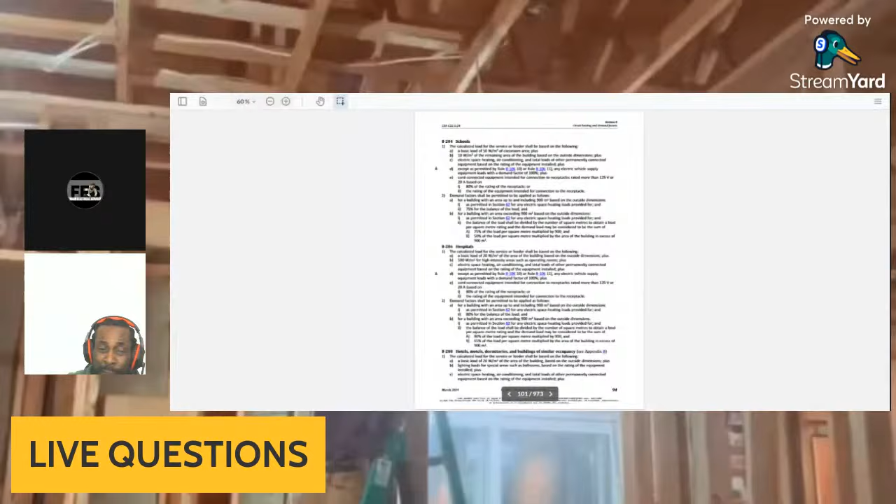So when it comes to overloading, avoid overloading the circuit. It's always best to follow the 20% rule that they have. That 20% rule is basically there to protect the wire.

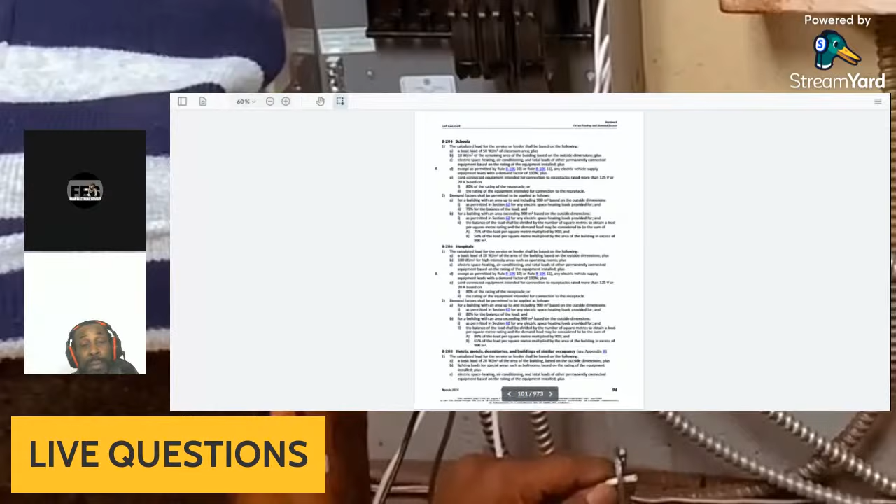So when you overload the circuit, that 20% rule cannot take effect because the circuit is overloaded, and your receptacle is either going to burn out or it's going to keep tripping. That's why a lot of times you'll see in washrooms, if you have your bathroom receptacle and you're using your hair dryer and your bathroom receptacle is hooked up to the lights and so on, your circuit will start tripping because that circuit has gone into overload.

So that's basically what happens when you overload the circuit. Rule 8-104 says maximum circuit loading: continuous loads must be calculated at 125%. Example, math: 20 amp breaker times 80% equals 16 amps continuous load. Example, electric heater drawing 16 amps. A 20 amp breaker can safely carry about 16 amps continuously.

So again, on real installations, you have your EV charger circuits, your electric heaters, your lighting loads. These are all sized accordingly. It's always best to make sure there's nothing else on the circuit when you're connecting your EV charger circuit and your electric heater. On jobs, I've seen 14 gauge wire on a 20 amp breaker. That's a problem, and that's how overheating happens. So you have overheating, and you also have overload.

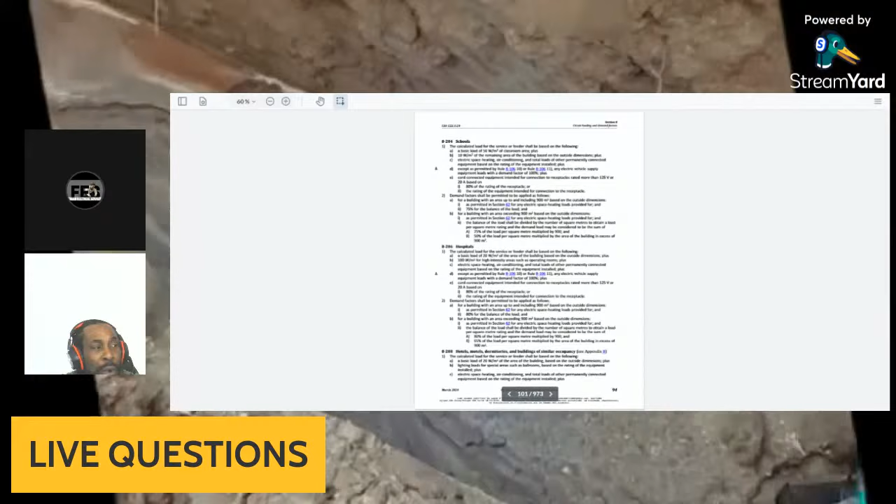So again, we're just going to run through this quickly here. Oversized breakers, wrong conductor sizes, ignoring continuous loads — these are common mistakes that you see on the job site. Again, common mistakes I see on job sites: oversized breakers, wrong conductor size, ignoring continuous load. Always best to make sure, because small mistakes in breaker sizing can create serious overheating risk.

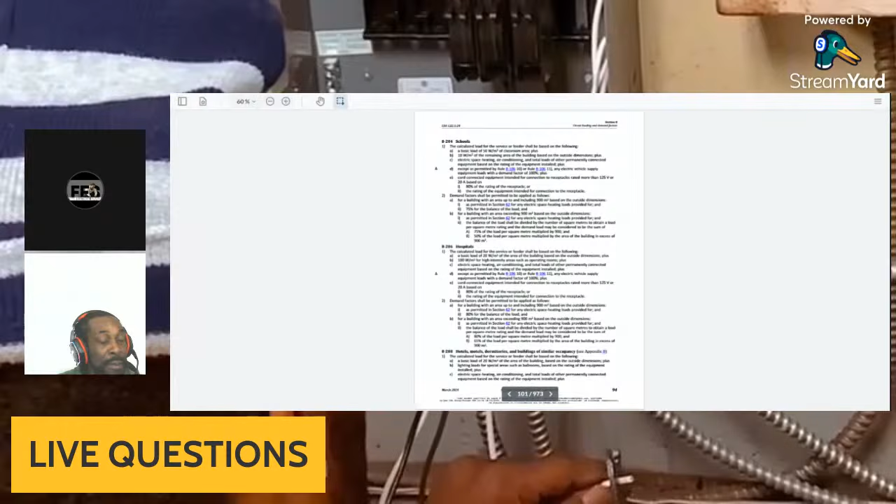So what breaker sizing mistake do electricians see most often? For me, most often I see is the 14 gauge wire on a 20 amp breaker. Again, you can type in the comment section if that's what you see on your job site. Have you ever seen a number 14 wire on a 20 amp breaker? Do you apply the 80% rule on continuous load, which is very important, or do you just go with the rule of thumb, the guessing game? What do you do?